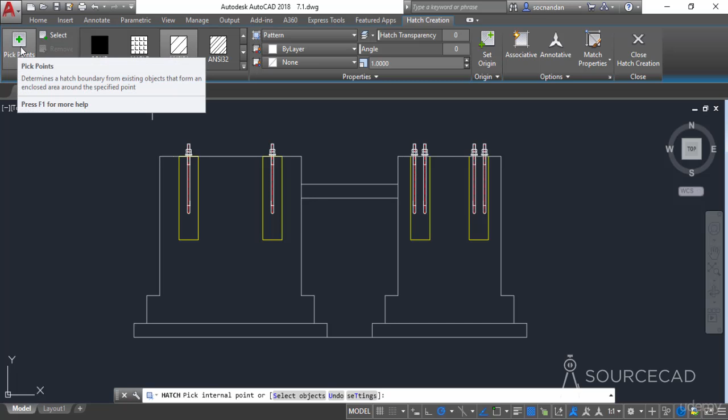Let's start with the first option, which is pick points. Select this pick point, click on it once, and the cursor will change into this point selection cursor. By default the cursor will look like this, but if it's like this pick box type, click on pick points to change it to the point selection cursor.

Now let's move to the drawing area, and when you move, you'll notice that whenever the cursor finds an island, the hatch pattern will be applied there. As I moved my cursor here, the complete area got highlighted and the hatch will be applied here.

Now let's move my cursor. I'll move it to this area, and now the hatch will be applied here. You can see that the hatch pattern will change depending upon the area where I am clicking, and you can see the preview here. So let's now select this area for applying our hatch.

Now our pattern is applied, and the default pattern of ANSI31 is here. Obviously this is not looking like this ANSI31 pattern because the scale is not correct, which we'll change. But first we need to look into other patterns also.

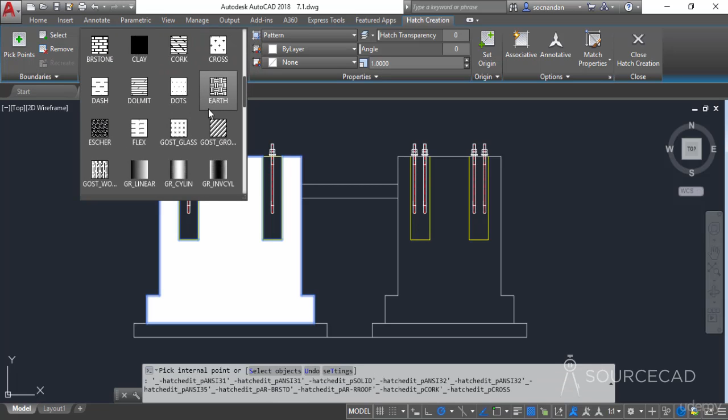So we currently see this solid, ANSI31 and ANSI32 patterns, but there are a lot more patterns available in this hatch tool. Let's click on this small arrow right beside the pattern panel, and it will show all the remaining patterns which are available here.

You can select any of these patterns from this list, and you can even create your own pattern if you want. So I'll select this gravel pattern for this case, and even when I change my pattern to gravel, still it's looking like a solid pattern. Obviously we'll take care of this also.

So let's first move to the next option here. On the properties panel, we can change all of the properties which are related to the current hatch. The first property that we need to change is the scale. Obviously the scale is not correct, that's why we are seeing this as a solid hatch. So here we have the scale option, which is set to 1.

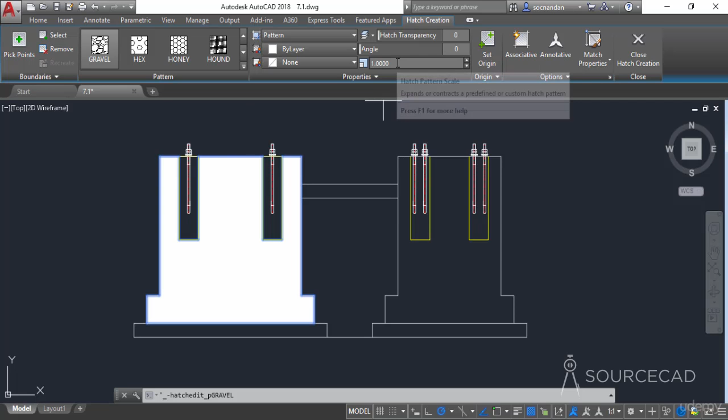Now let's change the scale value to 100 and press enter or tab key, and now the hatch pattern is visible. So we need to change scale to an even higher value. Let's change it to 200, press enter, and now this looks appropriate. So I'll keep this scale. Now the scale has been applied.

Let's look at the other options here. Obviously we have applied the pattern, and you can select what you want to apply, for example either solid, the gradient, which we'll learn in a moment, and also the pattern. We have some user defined patterns also, and if you have defined one, you can select that as well, but that we are not going to select for now.

Now here in this dropdown, we have an option of changing hatch color. So currently by layer is selected, which simply means the color of the layer will be applied to the hatch, but you can select any of these colors, and you can go to more colors if you want to select from any of these tabs. Obviously we don't need to change the color as of now.

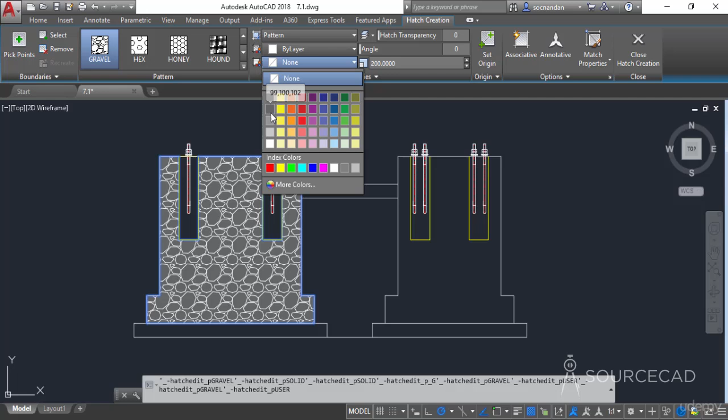And here we have the background color for our hatch. So if you want to change the background color for your hatch, you can select this option here. Obviously in this way you can select the background color, so we are not going to change that also. Now we have the option of hatch transparency, which is set to 0.

You can change this transparency value from 0 to 90, 90 being the highest value, and that will make your hatch pattern a little bit dim. You can move this transparency slider towards right, and as you can see the transparency is changing, making our hatch pattern more dim. You can move it back to keep the default value.

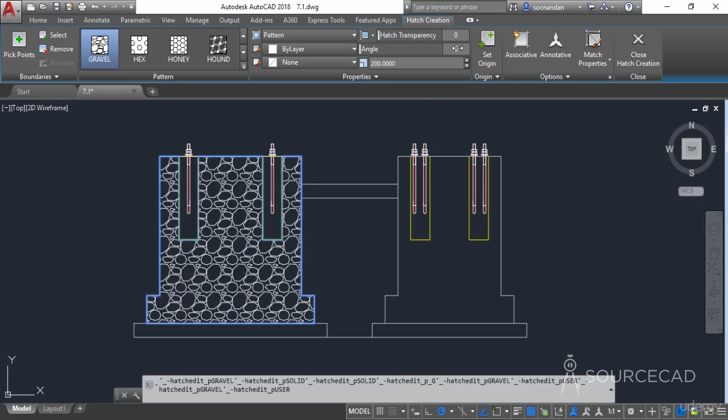We also have an angle here which is set to 0. Changing this value will rotate the pattern of your hatch. For example, let's enter 45 and press enter, and you can see there is a rotation in the pattern of these hatches. Although it won't be very apparent in this gravel pattern, it will be very visible with other straight line patterns.

For now I'll change this value back to 0. Okay, so now we have changed these properties. Let's expand this properties panel and look at one more option here.

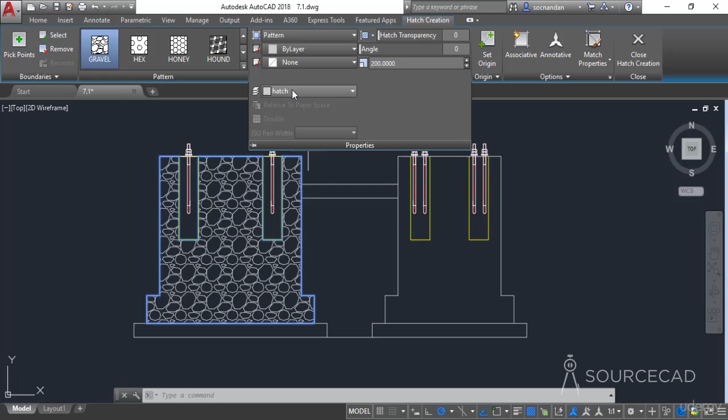Now here we have a layer assignment. Currently the hatch pattern is assigned to this line layer. If you want to assign it to any other layer, you can select it from here. For example, I'll select this hatch layer, which is already made for these hatches. So now only these hatch patterns will be assigned on that hatch layer, and we'll learn about layers in the next module. Once these settings are done, simply click on close hatch creation.

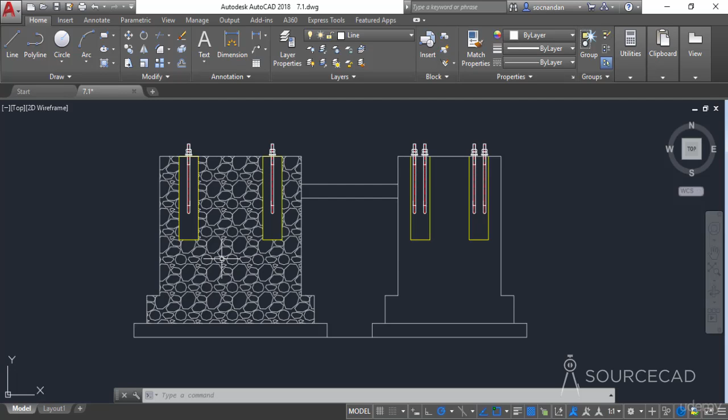And here we have our final hatch. Now that's not the only way of making hatches, there are also other ways of making it. So I'll simply select this hatch pattern and delete it.

Now let's go to this hatch tool again, and once again we'll select some areas. First I'll select this area, then this area, this one, and this one. So in all of these areas, we need to change the pattern.

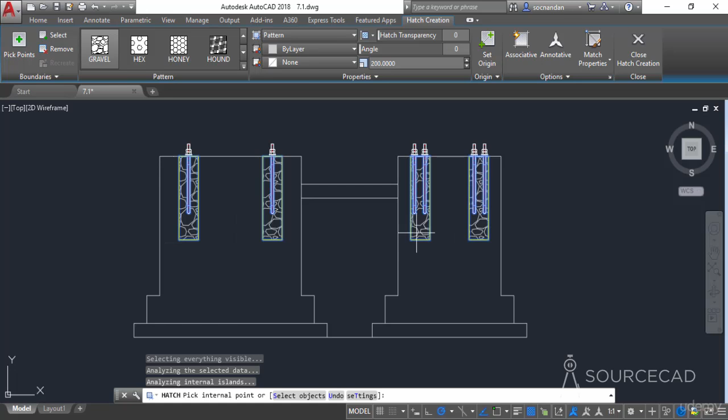Obviously this gravel pattern is not required here, so I'll click on this arrow to expand this list of hatches, and I'll select the ANSI31 pattern. So that's the pattern which is applied here.

Now, if you want to add more areas, you can select it by simply selecting the island here, or you can also select this option, the select option, and that will allow you to select the boundaries. So now you'll see that your cursor changed into a pick box, and you can simply click on the boundaries now, and that area will be selected for your hatch.

You can simply repeat the process for this side as well, and here it is. So these are two different ways of selecting hatches, either with a pick point or with the pick box. Obviously, if you need to remove some of the boundaries, you can select this remove option, click on the boundaries to remove the hatch patterns. So here we have it.

So now we'll apply this hatch pattern and we'll change the angle also. In this case, you can see that the angle is 45 degrees, but that will be the default angle of hatch. Now let's move on to this angle option, which is set to 0. Let's now change it to 45 and press enter. You'll notice that the lines will become completely vertical.

In this case, the angle measurement will start from the current angle of your hatch. Initially, the hatch was inclined at an angle of 45 degrees, so changing its angle to 45 degrees will add 45 degrees more, making it a 90-degree angle with respect to the positive side of the x-axis. That's why we have this vertical angle here. So I'll change it back to 0.

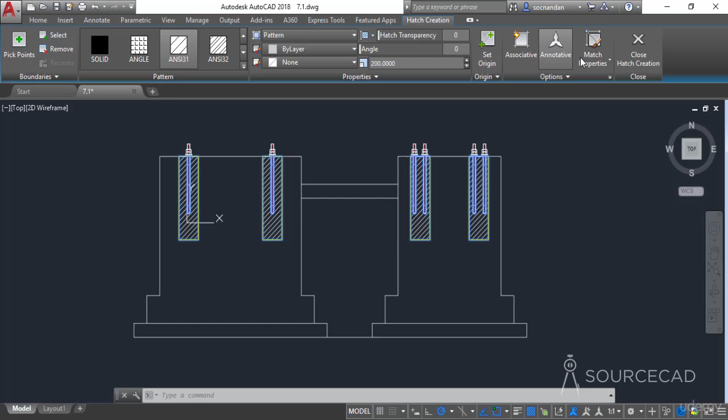And we have many other options here, like the origin, associative hatch, and some other options in this panel, which we'll look at in upcoming videos. For now, I'll simply uncheck this associative option, and without changing any of these properties, I'll select close hatch creation. And here we have it, the hatches are now applied. So in this way, you can create simple hatches in AutoCAD.